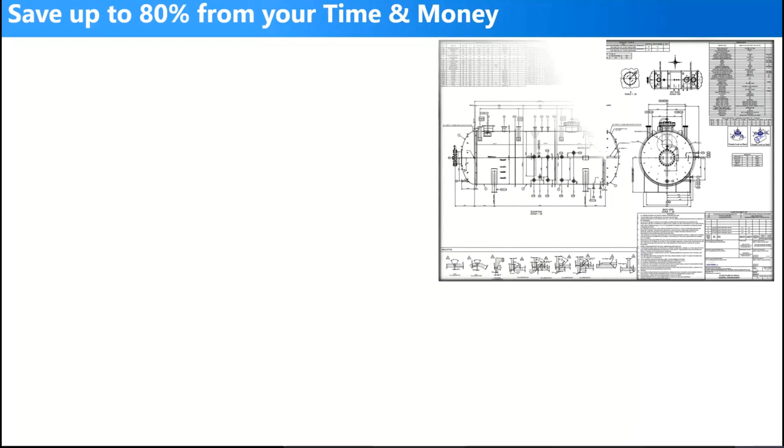You can create your bill of material automatically by using SEG software. Actually, you will need Autodesk Inventor as a platform to be able to run SEG. By using SEG software, you can save up to 80% of your time and money. We made an actual case for an equipment. This equipment we created by 3 methods.

You can see that we created all of those drawings by 3 different methods. The first one is the traditional method using 2D CAD software, and we created those drawings in 50 hours to generate the general arrangement drawing with all tables, notes, design data, welding details. The same for bill of material, manway detail, nozzle detail, nameplate, saddle, and the other details for this equipment.

By using a CAD software like SolidWorks, Autodesk Inventor, CATIA, just pure CAD software, we consumed around 27 or 28 hours to generate the 3D model.

Sorry to interrupt you, Mr. Ahmed. Hello. Yes. Sorry to interrupt you. Your voice is not coming very clear and it's coming with a low voice. Can you speak more loudly and more clearly? Okay. Hello. Yeah. Okay. Now it is okay. Now it's okay.

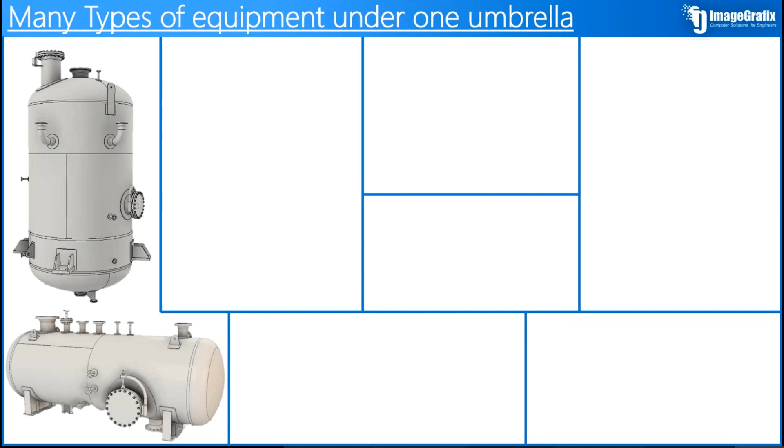By using SEG software, you will be able to generate many different types of equipment under one umbrella. You can generate horizontal, sloped, and vertical vessels. You can generate columns with multiple sections and different diameters, storage tanks with a fixed roof, heat exchangers according to TEMA, piping, ducts, and slug catchers.

Here are some real samples generated by SEG software. As you can see, we generated a storage tank with a fixed roof, and you can see the top and bottom plate arrangement, spiral stair, manway and clean-out door. And here are some samples of vessels created by SEG software, and you can see that from small to large size vessels you can create them easily.

You can make piping on the equipment easily, and elements like the end closure. You can generate the TEMA exchanger types by using SEG software with many different types, and we will discuss it, inshallah, in another slide.

In SEG software, we depend on the construction tree. In the SEG tree, you will build your equipment, and in this tree, you will define the equipment and each element inside this equipment. We have different levels in the tree. The first level is the project level.

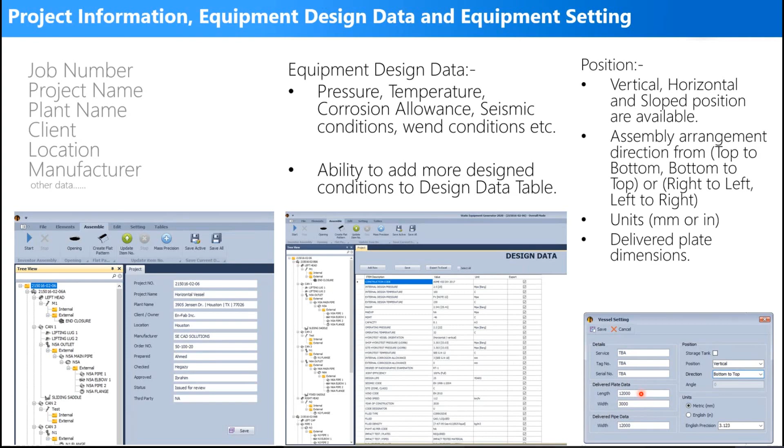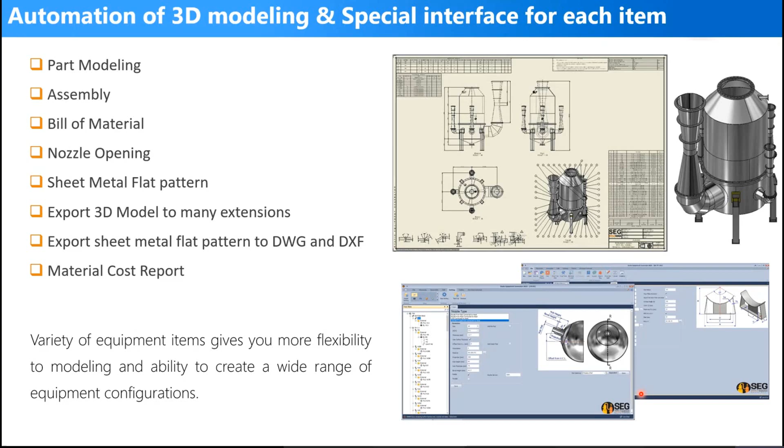Mr. Ahmad, skip this one. Okay. Yes, skip this one. This is not our product. Just a minute. Can you go back to the previous slide, Ahmad? One more previous. Can you just clarify the plate nesting cutting part? Can you give them some idea? Yes, this plate nesting is required. Can you explain this? Okay.

There is a nesting tool Autodesk provides, so we can use it in SEG to generate the nesting for all plates in your project. SEG software creates each plate as a separate plate, and you can get the flat pattern of this plate, and easily you can make a nesting for your equipment. As you can see here, we make a nesting for plates, and automatically by using this nesting tool you can generate the required number of plates and the efficiency of cutting, how much you can save from your plates during this operation.

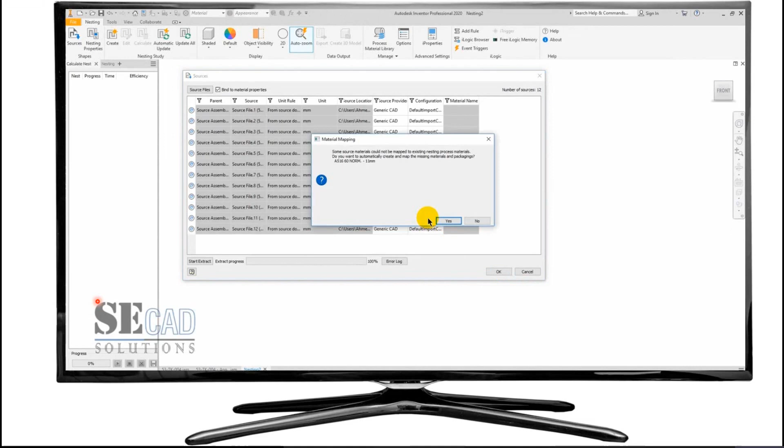And here is a video to show you how to make a nesting for the annular plates. For example, we will open the assembly created by SEG, and here we will make a nesting study for the plates. Let's click yes. And here the nesting tool from Autodesk will detect automatically the thicknesses and the material of plates, and depending on that it will generate a study based on the thickness and material of each plate.

After making the nesting, if we stop this, you can see that after this process you can calculate the required number of plates and make a nesting for this. That's a bottom plate, and we can make the same nesting process on it. So let's modify this.

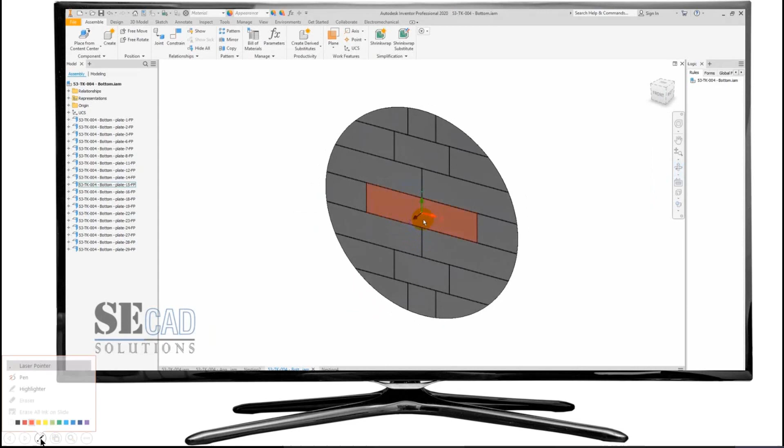Okay, so let's move forward here, and you can see that after the nesting, those are the elements of the bottom plate, and here the nesting of those plates, and you can see that in some cases you will get two plates in one sheet, and the same here.

And if we come back to the annular plates, you can see that the nesting efficiency here is around 80%, so you can save this value from the plate dimension, and for the number of total plates required, you will need 3 sheets, and in those 3 sheets you will get 12 parts of annular plates.

So by using this nesting tool, you will be able to make a report. Here you can generate a report for the nesting. Okay, and here you can export this report in PDF format, and you can calculate the cost and many different things by using this tool. Okay.

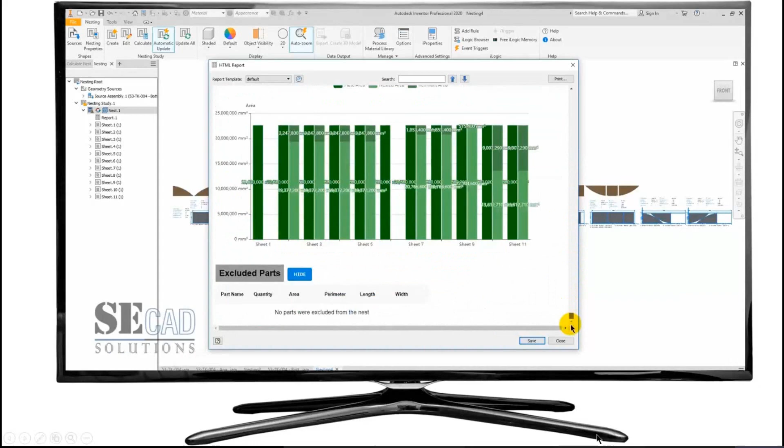Another tool is for importing the exported CSV file from HTRI. So if you are using HTRI software in the thermal calculation, you have the ability to export the CSV file from HTRI, which includes the tube arrangement on the tube sheet. And we have an integration tool. This tool can read the exported CSV file and generate the tube pattern arrangement. By using this tool, you will be able to make the holing for tubes, tie rods and sealing rods.

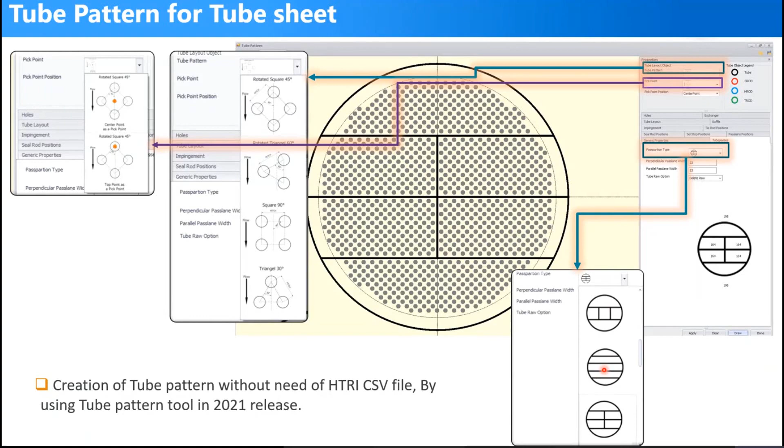Okay, we have another tool in SEG software. You can use it to generate the tube pattern arrangement if you don't have HTRI software. By using this tool, you will be able to change the tube layout or the tube pattern, the pitch of the tubes, and the pass partition, and we will discuss this in depth in other slides for the heat exchanger. Okay, let's skip this slide. It's for the tube pattern, because we will discuss it.

Sorry, Mr. Ahmed, just to interrupt you. I want to know whether all this data will come directly from PV Elite, or how is the interaction? Because what I understand, you are interacting with three softwares, no? SECAD, Inventor, and PV Elite. But where is the PVLite data coming from? I'm not able to understand how this data is coming from PV Elite. Okay.

So SEG software includes an integration tool. This integration tool has the ability to read the exported MDB file, which is an Access database file. You can export this Access database file from PV Elite. But this Access file has some limitations. For example, if you would like to export information for a heat exchanger, no information will be exported for the tube sheet or the flanges of the tube sheet. So this tool in PV Elite software has some limitations.

But in Visual Vessel, you can export a lot of information to the Access database file. In SEG software, you can read this exported database file and convert it automatically to SEG items: shell, head, nozzle, supports like saddle, and we will check a video like that during this session, inshallah. So this way, you have a model in PV Elite. You will export an Access database file from PV Elite. After that, by using SEG software, you will read this exported MDB file and convert it to a 3D model in Autodesk Inventor. And in the same way, you will create the 2D drawings of this equipment.

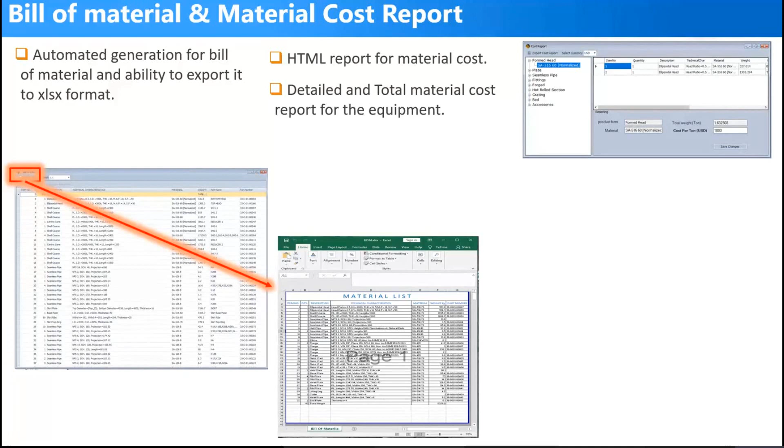Here in exporting options, you have the ability to export the 3D model. Okay. You have shown one development of the plate. So can we do the opening before the rolling? Is it that accurate? What do you mean by nozzle opening? Can we cut out the openings before the rolling? Yes, yes. Is it that accurate?

By using the holing process, you have the ability to define the clearance of the cut around the nozzle. After that, by using this tool, you will get a cut around the nozzle with the clearances that you defined, as you can see here, there, and for each nozzle. After that, by using the sheet metal flat pattern tool, you will get a flat pattern for this shell plate with all nozzle cuts. Is this point clear, or do you still have any issues?

I want to just clarify how it is accurate. If I am doing the opening of the 24-inch nozzle at the time of the plate cutting, and after doing the opening in the plate cutting itself, I do the rolling, after the rolling, should I get the exact dimension as I required for the nozzle opening? Hello. Actually, I wanted to understand your question correctly to answer you correctly. I will repeat one more time.

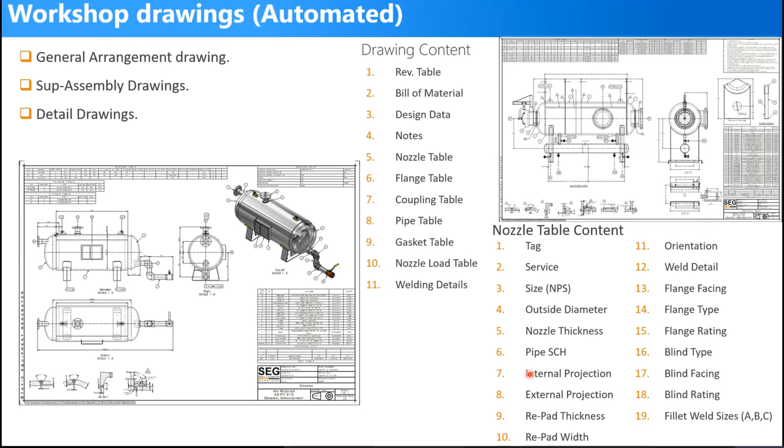In SEG software, you have the ability to select your standard border from the choice of the company border, or if you would like to create your standard border, we generated a new tool for that, and we will discuss it inshallah in another slide. By using this tool, which is importing reference drawing, you can import your reference template, which includes your title block and your border, and you can use it in your drawings automatically. In each drawing you generate, you will use this reference drawing. In SEG, you can find a huge library of standard welding details, and you can select from them to export to your drawing.

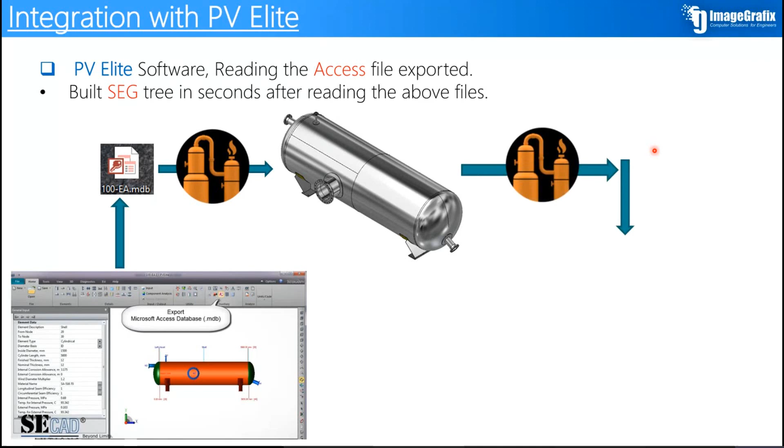Here, that's the PV Elite integration tool. In PV Elite software, you will export the MDB file, which includes some data of your equipment. And by using SEG software, we have the ability to read this MDB file and convert it to a 3D model on Autodesk Inventor. After that, you will be able to generate your drawings for this equipment. Here in this quick video, we will discuss how we can do that.

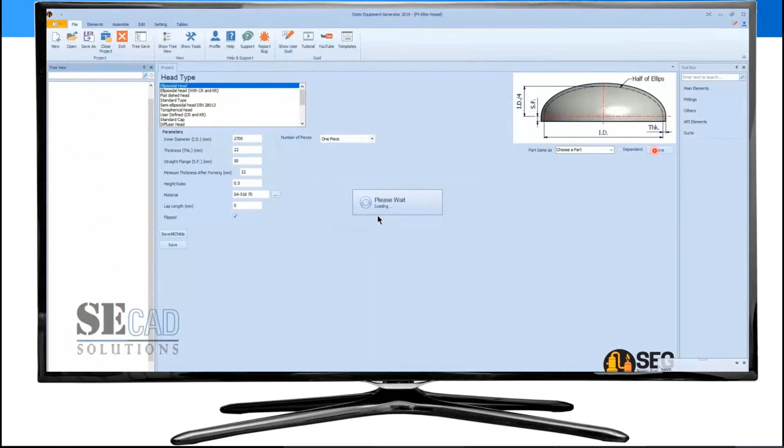Here we generate a new project, and from the import tool we will import the MDB file, with some information like the welding detail, longitudinal welding line orientation for each course, the saddle support. After importing the information, you can see that the tree is created automatically in SEG. Now we will save all information by using the tree save button to save all information that we imported from the MDB file. And now we will generate the 3D model on Autodesk Inventor. Okay, now we have the complete 3D model.

After that, you can make some customizations on this model, like modifying the support saddles to suit your fabrication requirements, add some attachments like the nameplate, because in PV Elite there is no information for the nameplate, so you can import a nameplate or some supports or some internals, modify the davit for the manway and the bolts. Many other things you can add to your equipment after importing it from PV Elite to make it suit your application requirements. Okay, now we will go to another slide.

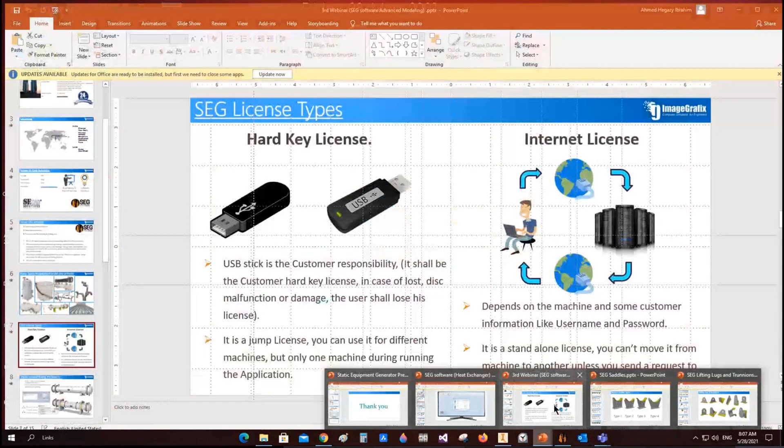For the... here that's for 3D modeling. We need to, so let's close this. That's for heat exchangers.

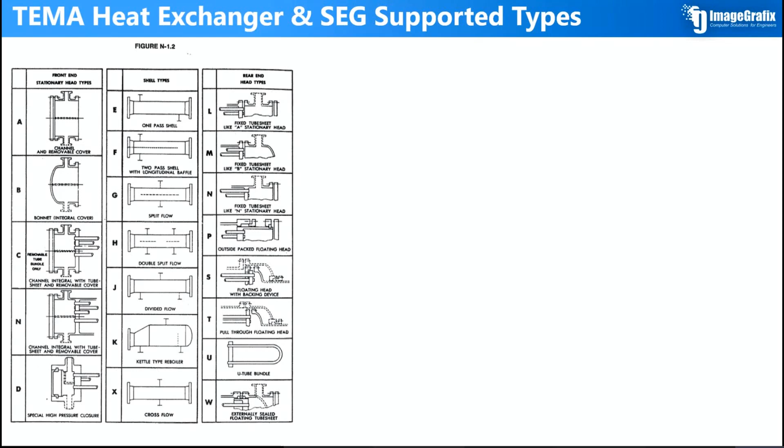Here for TEMA heat exchangers, as all of us know, the TEMA exchanger type includes these three sides: front end, shell type, and rear end. By using SEG, you will be able to generate A, B, C, N types for the front end, and you have the ability to generate all types for the shell type. And on the rear end, you have the ability to generate L, M, N, S, U types.

For the front end, as you can see, on the A type, for example, you have two different cases, and if you would like to make a modification or generate an odd shape, you can do it by creating the items separately on the SEG tree, and we will discuss that inshallah. And for example, for the C type, the channel integral with tube sheet and the cover, so you can generate those types for the front end.

And for the shell type, you can generate all types on the shell side. And for the rear end, you have the ability to generate those types. For example, in the L side, if you would like to make a channel like this or with a cone like this, and the other types of S, M, N, and U.

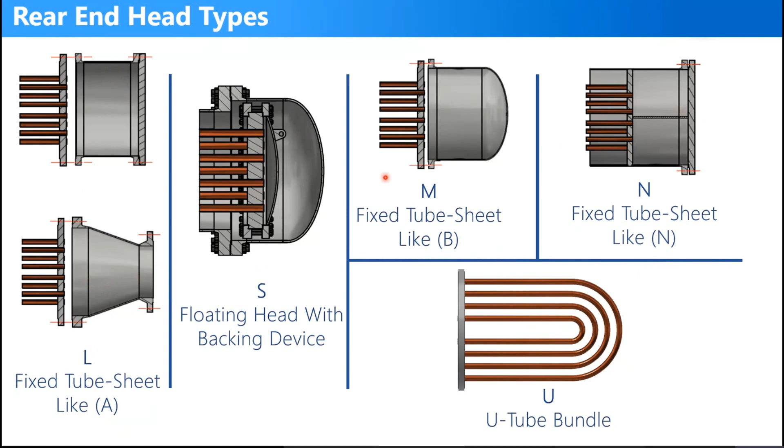Some of the most common types of heat exchanger, like AES, BES for the kettle type, or the AEM or BEM, you have the ability to make that. In this video, I will show you how to add items of the exchanger manually, if you would like to generate the exchanger element by element instead of using the exchanger tool.

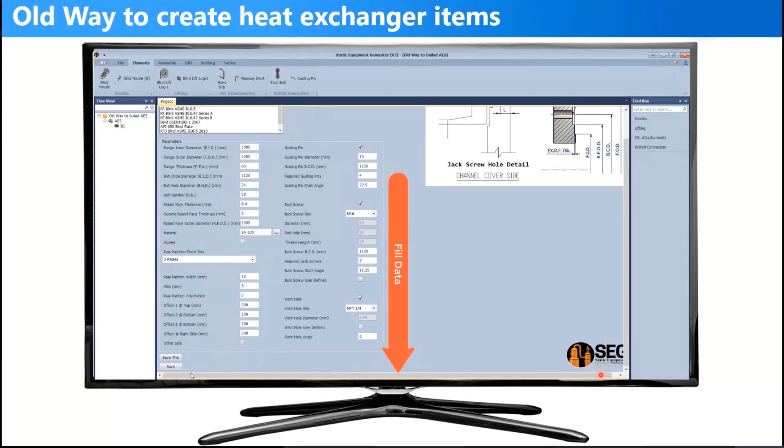So as you can figure, we add a blind nozzle. After that, we add a gasket and flange. To generate a channel, we will add the items separately. So the channel includes blind, gasket, another flange, shell, flange. Okay, so we will generate those items

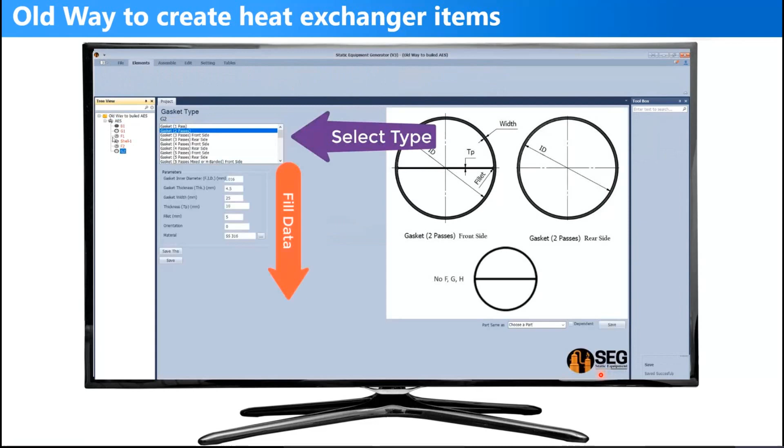separately and define the dimensions of each item on the tree by filling the data from the interface or the input data of the element. Okay, so you will select the element. After that, select the suitable type and fill the required data on each element.

Okay, the benefits of using the exchanger tool, which is the parametric modeling or automated parametric modeling. By using the parametric modeling tool, you have the ability to equal some parameters with each other. For example, if you have an ellipsoidal head or a hemispherical head and a shell after this head, if you define the diameter of the head separately, it will not be reflected to the shell. So you will need to come back. Like in PV Elite, if you change the diameter of the shell, it will change it separately.

But here, if you would like to make a relationship between some parameters, like make the inside diameter of the head equal the inside diameter of the shell. And if you would like to make more than that, more items, not 2 only, if you would like to make it for 10 items or more, it's applicable. So by using this tool, you have the ability to equal some parameters with each other.

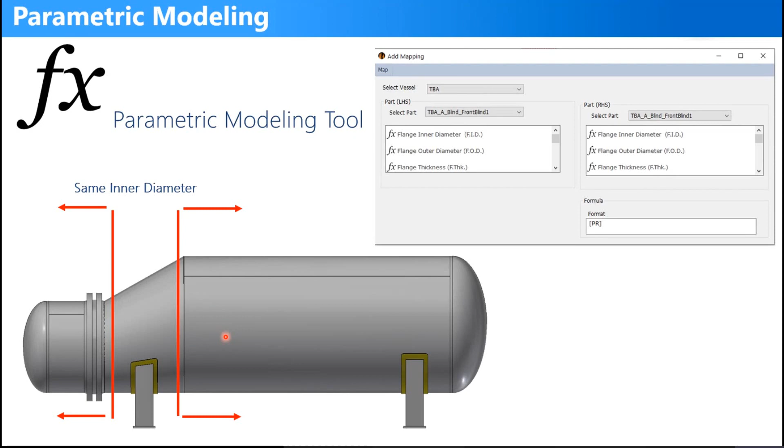Like if we take a look at this video, for example, here we have an ellipsoidal head. So the inside diameter of this head, as you can figure, is different from the shell inside diameter. By using the parametric relations, we will generate a new relation between 2 parameters. At the beginning, here we need to define the first part, which is the left head. This name is indicated here on the tree. It's the left head, and the second element is shell.

So by using this tool, we will select the first element and select the required parameter, which is the inner diameter of this ellipsoidal head. After selecting and double clicking on it to appear here, this parameter is selected now, and we will go to the second side and select the shell. After selecting the shell, we will select the inside diameter of the shell. So now we will make a relation between them and make them equal each other.

Okay, you will click on mapping and close this form. After that, we will define the inside diameter of this ellipsoidal head. So we will change it to 1500 and come back to the shell. You can figure that the diameter is changed automatically. The same we can do with other parameters like thickness.

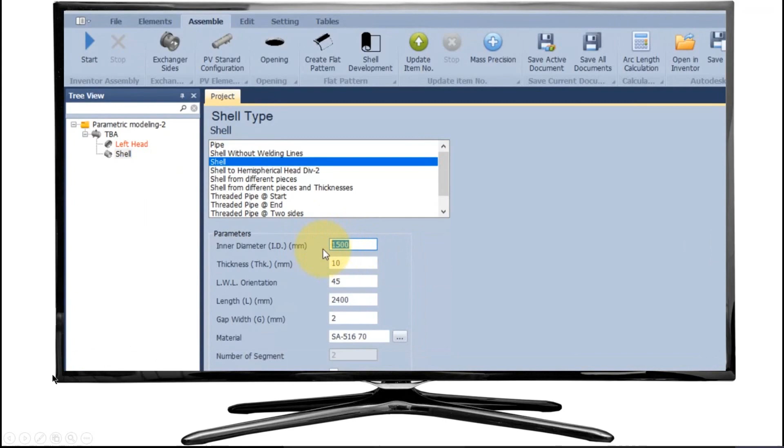For example, if we open that one and select the thickness in this case, and from the right side we will select the thickness. So we will make a relationship between the thicknesses for each item. So you have a new equation for the thicknesses. So automatically, in case of changing the thickness of one of them, it will be reflected to the other. So let's come back to the left head to figure out that we change the thickness of the head.

In heat exchanger, we will automatically generate the relations between elements. For example, if you have connected flanges for the channel, the blind flange and the connected flange and the gasket, some of those relations will be generated automatically, like the outside diameter of the flange; they should be the same. If you change it on one side, it will be changed on the second side.

The bolt circle diameter, the inside diameter and the clearance, number of bolts, raised face diameter, and diameter of bolt holes. So those are a sample of relationships for some items. So in case of changing the number of bolts on one side, it will be changed automatically on the second side.

The inside diameter of the flange, the outside diameter of the flange, the number of holes, all of that will be reflected. Okay.

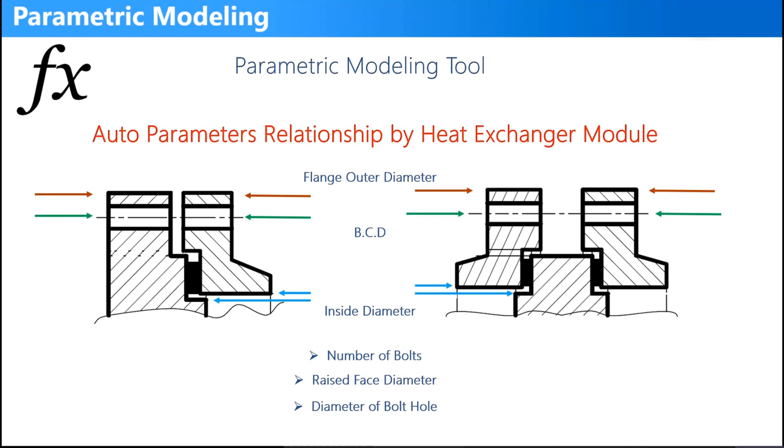Actually, this type of saddle was a requirement from one of our clients. They are a heat exchanger manufacturer in Canada, and they are a great manufacturer. They usually use this type for their heat exchangers, and they asked us to add this type to be able to use it in their models. Okay, now we will discuss the different options in each type.

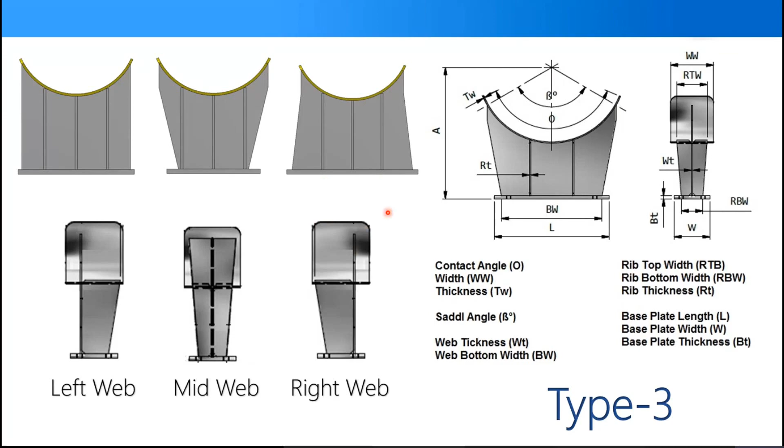More options you can do on the saddle, like the saddle cut. If this area is tight and you need to tighten your anchor bolt or the nuts of the anchor bolt, some manufacturer specs include this cut on the saddle. So by using this option, you can make a cut on the saddle to suit the fabrication requirements. You can also make slot holes instead of straight holes.

And if you have a saddle with a sliding plate, like you have Teflon below it and another fixation, you will not need holes, so you can make this saddle without any holes. You can control the pattern of the holes, on the short side or on the long side, so you can make a hole here or there.

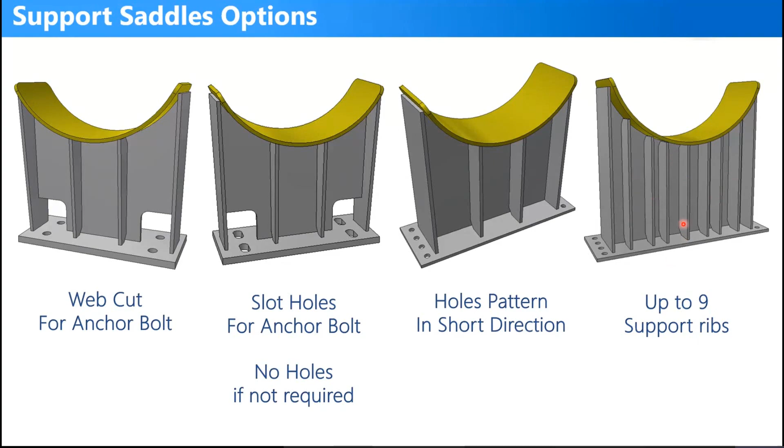You have the ability to add up to 9 ribs on the saddle. I think this number is fair enough. Okay, the same we discussed on this slide for the drawing. So let's close this and come back to some options for the type of licenses and the drawing options.

The license of SEG software is available in two different types. The first type is the hard key license, a USB stick that includes a license file. By connecting this USB stick to your machine, you will be able to run SEG software, and if you remove it, you will not be able to run it. The benefit of this type is that you can run SEG on different machines, because this license is a jump license. You can move it from one machine to another; it depends on the USB stick itself.

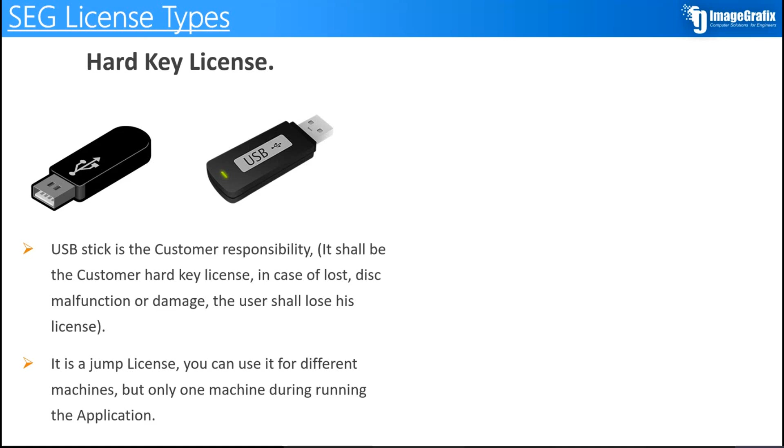If you move it on another machine, you can run the SEG software on this machine. Okay. The second type is the internet license type. In this license type, you should be connected to the internet all the time, and your license will be defined by your information, like your email, the login information and the machine information.

So in this type of license, you will not be able to change the machine unless you make a request to change your machine. Okay, on the same day we can do it. If you would like to remove your old machine and replace it with another machine, you will make a new request, and we will give you the ability to use your new machine. But this type of license depends on the internet, so you should be connected to the internet all the time while you are running SEG software, and you will not be able to change your machine unless you send a request.

Okay, that was our last webinar. In the last webinar we discussed some points regarding the project assemblies, like if we have a stacked heat exchanger and we would like to make an assembly for this heat exchanger by using the project assembly tool and defining the spacing between equipments, we can generate the assembly of both heat exchangers to create the final drawing for both of them, and generate the general arrangement drawing with multi-sheets.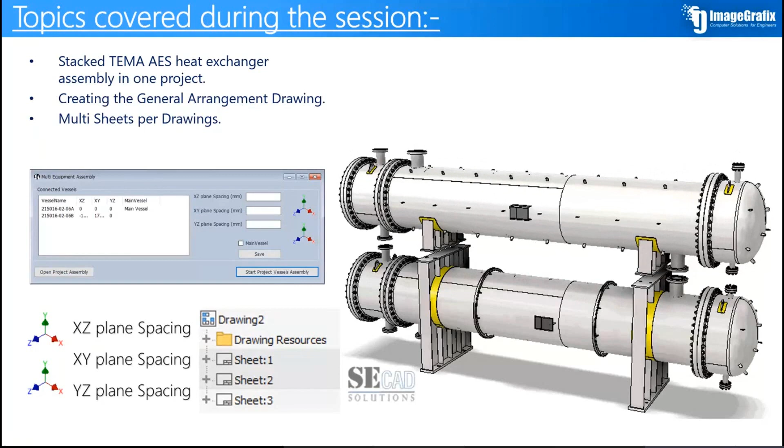In some cases in large equipments, you have a large bill of material, so if you add all the information in one sheet in your drawing, like the views of the equipment, the nozzle table, bill of material, design data, all of that in one sheet, it would be a lot of information in one drawing. And if you would like to separate some information in different sheets, you have the ability to do that by using a tool for making separate sheets in your drawing.

And then in this session, we discussed how to create the assembly for the jacketed vessel by making an inside vessel, which includes this coil, and we made this sample in this session.

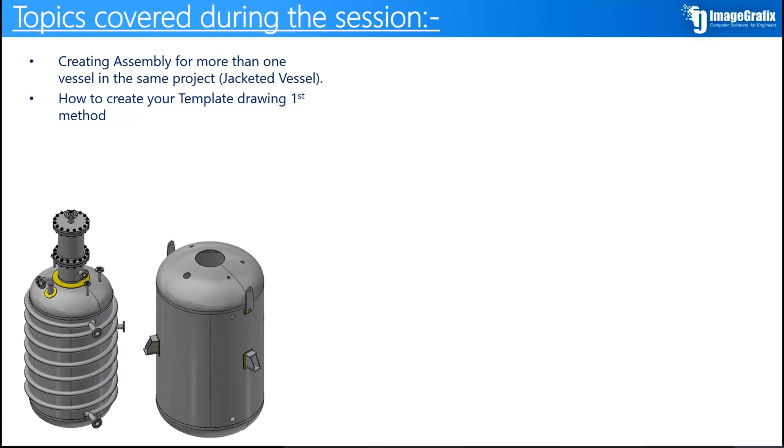Here in this session, we did the inside vessel and the outside vessel, and by using the project tool, we generated the combination of those two vessels and generated the jacketed vessel, which includes the inside and the outside vessel. And by using SEG tool, we generated a separate template drawing, and discussed how to generate your standard template drawing, and use it as a reference drawing for your projects.

Okay, here is how to create your border and how to generate your title block. And by using this tool, which is the import reference template tool, you will be able to import your reference drawing, define some dimensions for your standard drawing, and use it in your projects. And if you would like to change it from one project to another, you have the ability to do that, because you have some different information like the owner, the owner logo or the name of the project, so you can change your title block and border and make it a reference drawing for your project.

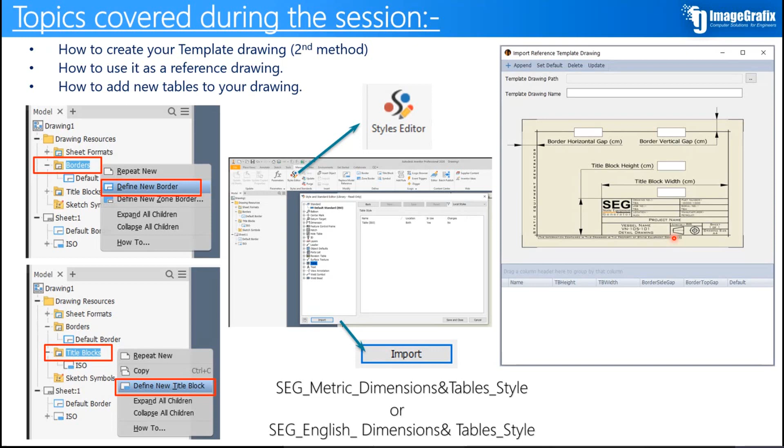Okay, and we discussed in that session how to change the units. You have the ability to change the units of your model and the units of your drawing. So you can make the units in fraction and control the fraction value. That's in case of inches. And in case of millimeter, you will make it decimal.

You have the ability to group. If you have different equipments in your project, you can make a group for the overall bill of material, or separate each equipment in a separate bill of material. You have the ability to make the size of nozzles in NPS or DN and change the sort numbering configuration to generate the general arrangement drawing of the equipment. Okay.

Here is the exporting tool. We discussed this on another slide: how to export the 3D model and how to save your models or your drawings in different extensions. Okay, so let's close this slide.

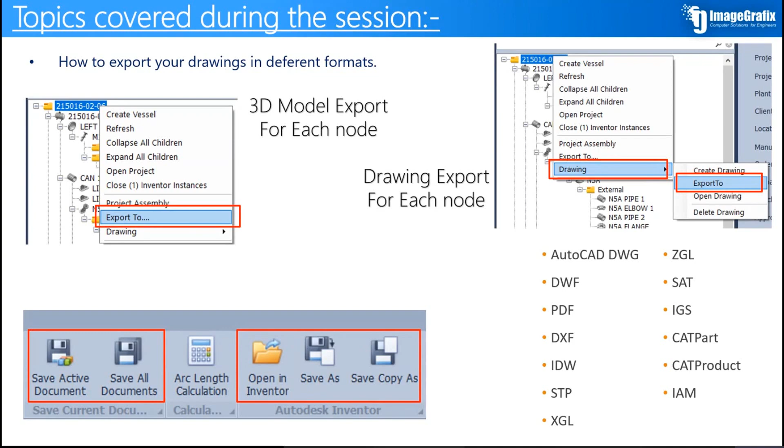The last one is for the lifting lug. Here, for example, we have different lifting lug types in SEG, so you have the ability to select between them to suit your case. For example, this type of lifting lug or that one. For this one, you have the ability to make this a circumferential lifting lug in the circumferential direction and to control the dimensions of this lifting lug to change the shape.

And you have the ability to add a wear plate or collar for this lifting lug. If you would like to remove them, it's optional, so you can do that. This type of lifting lug is usually used on large diameter vessels, and that one for large weights. So you have many different shapes of lifting lugs, and in each shape you have different options.

For example, for this type of lifting lug, you can make this edge a straight edge like this, or make it with this cut, and make this cut with fillets like this. Regarding the end at the top here, you can make it with a fillet or a chamfer, so it's an option. Many different options in each type give you flexibility to create many different configurations. For this type, you can make the end with a chamfer or a fillet, for the circumferential and longitudinal direction.

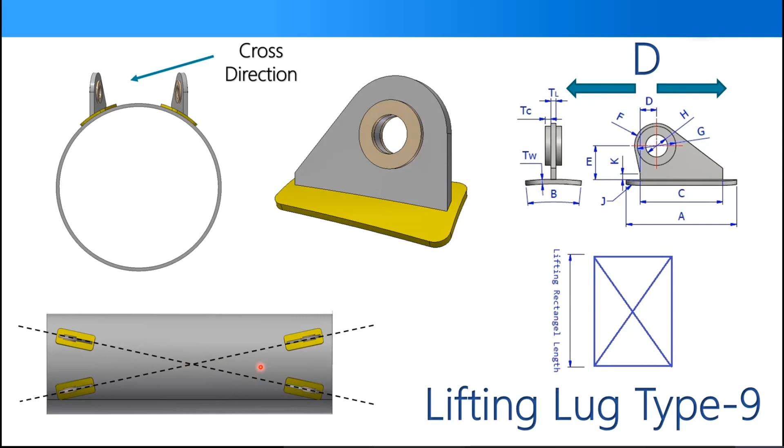Okay, now let's start creating a sample. We have the SEG software, and from here let's generate a new project. By clicking the New tab, we have this form for a new project, with many different modules. The first is the overall module, where you can generate all equipment and all features will appear, like the heat exchanger features such as the tube sheet, the tank roof and bottom plates, and the duct shapes. But if you select one of the modules below, only the features of that module will appear.

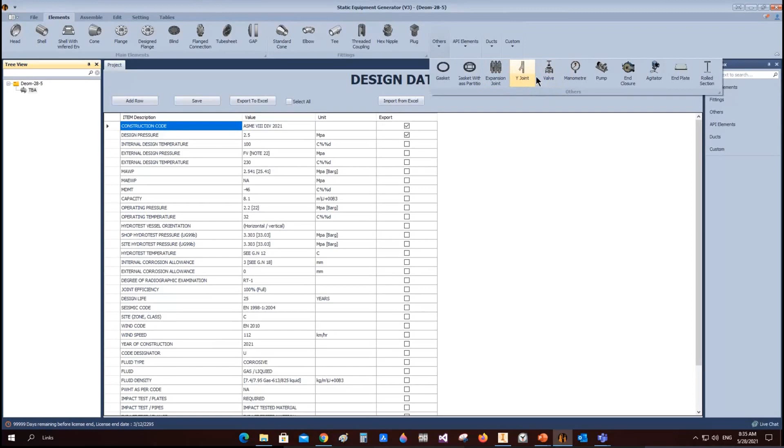And for... yes. Yeah. Can I share one of our PV Elite files and you just show how you can fetch it in this software? Chapan, let him continue first. Let him complete it. I think what he's showing is interesting. Once he completes it, then we can share it.

Okay. Here on the API elements for the roof, you can see the annular plates, compression ring, roof, arrangement roof, dome roof, many different types. Ducts, as we discussed, in case of generating a new project, if you select overall, all of those features will appear.

Okay, but if you select a pressure vessel, for example, the ducts features will not appear and the API elements will not appear. Some features like tube sheet will not appear. Okay, so in case of overall, all of that will appear. And you can select these elements from the toolbox right here.

So you have the ability to move this toolbar to different locations. So here you can add elements or fittings or others. So you can add elements from here or from this toolbar. Okay. Now let's add an ellipsoidal head, for example.

Okay. And after adding this head, you can see that we have more than 17 types of heads, like ellipsoidal head as half of an ellipse, or ellipsoidal head with crown and knuckle radius, or flat dished head, a diffuser head, standard cap, and you can get the shape from the image on the right hand side.

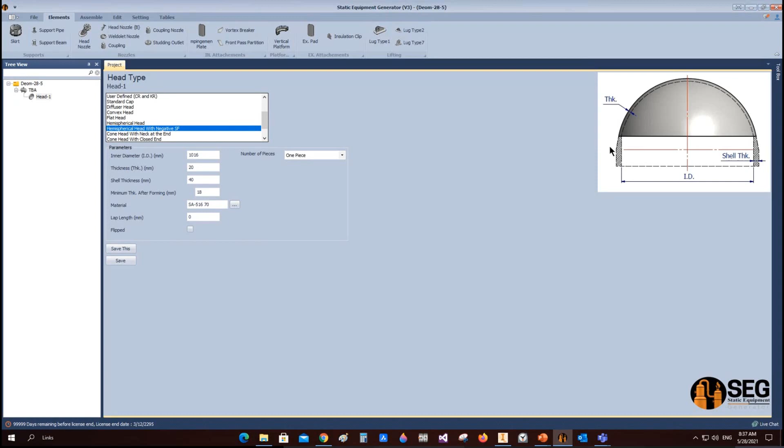From here, we will generate a head with 2 meters 0.5 and define the thickness, the straight flange length of this head, minimum thickness after forming, and the head ratio. And from here, you will change the material.

So you can write it manually here, or by using the ASME database material, you can select the material from the list. So first select the table according to ASME and search for your material like SA516. So you can see that the search gets 4 types with different grades. Okay, so just select the suitable grade, and here is the UNS number for this material.

And if you would like to make it an impact tested material or normalized, just select this checkbox. And if you would like to make any remarks for this material, like some extra tests will be done on it, you can add it on the remarks tab. Now let's click done to add the material here. So let's click this head, and let's click on assembly to start generating this head.

Okay, you can see that we have this ellipsoidal head now generated on Autodesk Inventor. Now, by the way, you have many different options on the head itself. For example, if you would like to make this head from one piece, you have an option to make it from one piece. And if you would like to make it from 2 pieces with a longitudinal welding line like this, kindly take a look at the image on the right hand side.

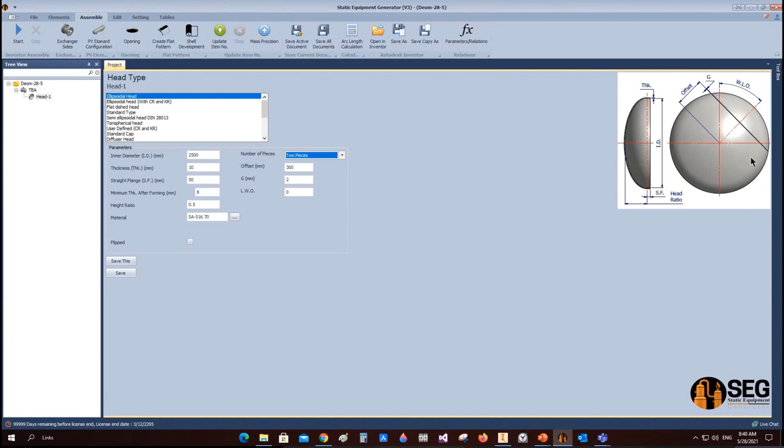So you have the ability to define the location of this longitudinal welding line and the orientation of this welding line. And if you would like to make it from segments like this, it's an option in the same head. So in the same head type, you have those options. So you can see that SEG gives you more flexibility to make the items with different configurations to create the suitable element to suit your case.

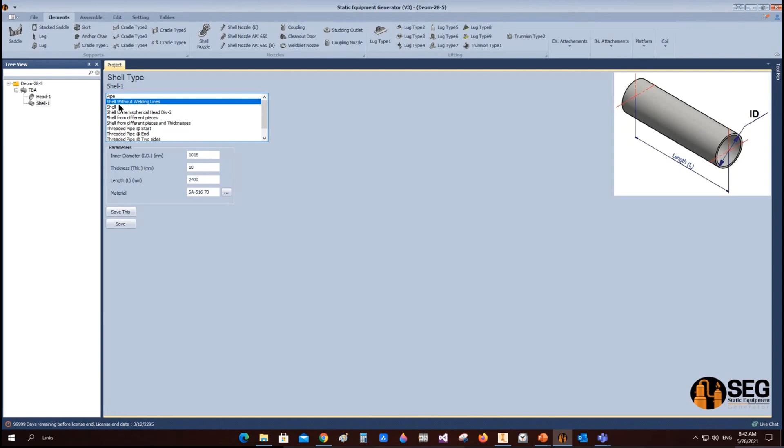Okay, the third type, which is the shell, includes welding lines in case the circumference of the shell is small and the delivered plate dimension covers it. For example, let's come back to the vessel, and from the settings as we discussed, that's the length of the delivered plate, and that's the width. That length will be rolled to create the circumference of the shell. If this value is greater than the total circumference of the shell, one sheet will cover it. But in case of large diameters or a small delivered plate length, SEG automatically detects the number of sheets required to make this circumference.

Okay, and here you have a tool for the arc length calculation. For example, if you have a vessel with 6 meters diameter and you would like to calculate the total circumference of this shell, you will need around 19 meters for the total circumference. So this value, which is 12 meters, will not cover the circumference of the shell. Okay, so let's come back here and complete.

So for the shell, you can generate this type of shell, which we discussed, the shell with chamfered edges for the hemispherical head for Division 2, or shell with different pieces. Those types, shell from different pieces and shell from different pieces and thicknesses, are usually used for storage tanks. For storage tanks, in some cases you may need to define each plate separately, so you will define the circumference length of each plate separately. And you also have the ability to define the thickness. So you can make a plate with 4 meters length, for example, with thickness 10 millimeters, and another one with a different length and a different thickness.

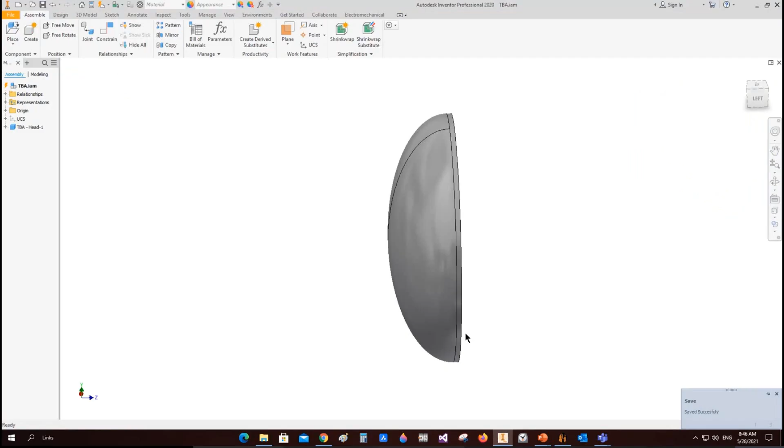Okay, now some more options on the shell itself. If you would like to make this shell with 3 or 2 or 4 equal plates, you have this option here by enabling segments. So by clicking on this button and defining the number of plates, if you take a look at the image here, you can define the required number of plates, but in this case they will be equal to each other.

Now let's add another shell course. So from shell we will add shell 2, and from this you have the ability to make the shell plate look like another old node on the tree. Here from this button you will select part same. And from this list you will see that you have only shell 1, because we have only one shell plate. So in this case we will make this shell look like that one. So all information here will be reflected there.

And if you would like to make it dependent, means in case of a change in shell 1, it will be reflected to shell 2. But in this case we need to make some changes on the length or longitudinal welding line orientation, so we will not select dependent and select add. And if we come back to shell 2, you can see that the same information of shell 1 is here. So we will change the longitudinal welding line orientation a little bit and change the length of this shell course a little bit and click save.

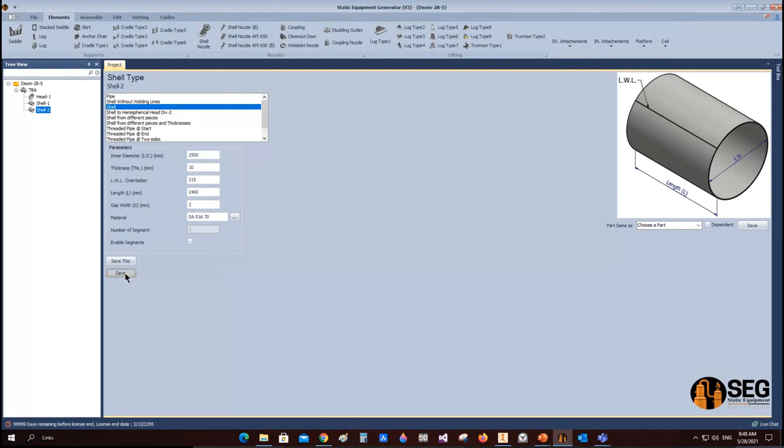Now let's add another head 2, and by the same way we will make it look like head 1. Okay, and let's click add. So if we come here, you can see that the same information of head 1 will be reflected here. One more option we will discuss after creating, which is the flip. This option will be available in some parts which need to change their direction, like the cone or head.

If you would like to make the large opening on the left side or on the right hand side. The same for the head, if you would like to make the convex of this head on the left side or on the right side. So let's create the assembly first, after that we will modify it. Here we create the second shell course, after that the last head. So let's take a section. Now we have this head on the tree, but it doesn't appear because of that. Let's take a section here.

You can see that the convex of this head looks like the first one. So if we want to change the convex direction of this head, we will use the flip option to flip the direction of the head. So we will click save here and flip the direction of the head.

Okay, now let's add some attachments to the vessel and check out how we can add them and modify them. Now we have this vessel without any sections. So let's come back here and select the head. From the head, you can see that there are many attachments you can add to this head, like support skirt, support pipe, support beam, nozzles, nozzles with internal projection, weldolet, coupling nozzle.

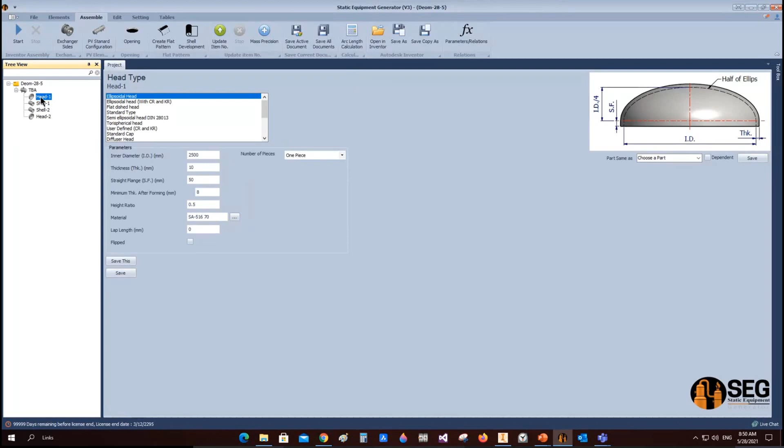The difference between coupling and coupling nozzle: this coupling is a coupling without any connections, but a coupling nozzle is a coupling you can add connections to, like adding a pipe and after that an elbow, etc. A studding outlet for the internal attachments like impingement baffle, vortex breaker, pass partition. For the head, you can add a platform, reinforcement pads, insulation clips, lifting lugs with different types.

So let's add a nozzle, N1. From add we have this nozzle, and you can see that we have different types of nozzles, like nozzle from pipe, nozzle from plate, long weld neck nozzle, or forged hub nozzle. So let's select a nozzle from pipe and select the size. Let's make it 6 inches, and from here change the schedule of the pipe.

Okay, select the offset from the center line. So we will define the offset from the vessel center line, this value, the offset of this nozzle. If you would like to make it at center, just make this value 0, but we will make it 750, and the orientation we will keep at 0 degrees, and keep the projection here at 30 millimeters.

The projection is the facing of this nozzle. Let's add a repad, change the repad width like this, change the thickness, and define the service of this nozzle as an inlet nozzle. And if you would like to define the nozzle load, you can define it from here. Okay, let's click save. Now this nozzle will be parallel to the center line and set in.

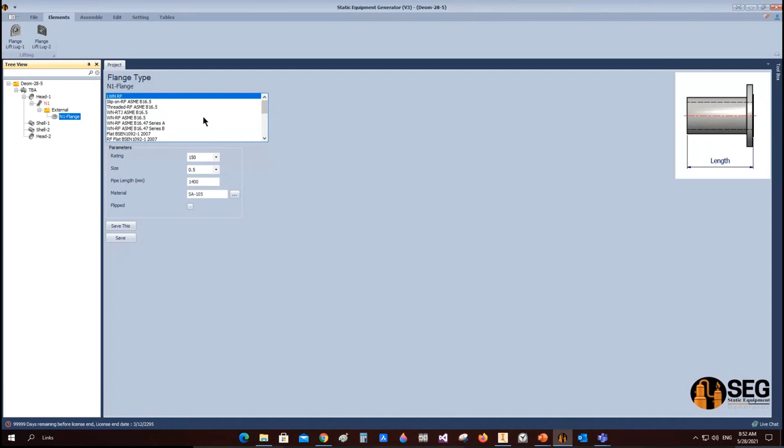Now if we come back to this nozzle and open the set welding detail, you can define the welding detail options of this nozzle. If you would like to set the fillet weld value, you can define it from here. Let's make it 7 millimeters, and click save.

Now if we open the calculator, you can calculate the projection with flange from the seam weld line, not the tan line, to the facing of the flange. For example, let's make it 1.5 meters and click calculate. Now SEG calculates the length. The projection of the pipe from here to there will be 861.

So we need to reduce it a little bit. Let's make this value 1 meter only, and click calculate. Okay, now this value is okay. We will accept this value, and you can see that the projection is reflected here. Now we will make this assembly of the nozzle.

If you would like to preview children during creation, there is an option in SEG that gives you the ability to preview elements during creation in Autodesk Inventor. If we come back to the settings of the equipment, under the preview options, you can preview the child during creation and the parent during creation. There are some other options we could discuss, and let's click save right now.

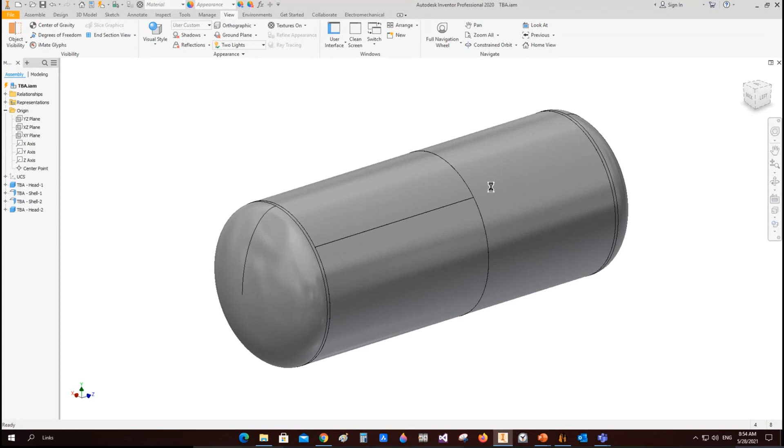Here we will need to make another nozzle with internal projection, and on this internal projection we add some attachments. So let's select this head or select the shell, for example, and from here you can figure that you have many different attachments on the shell, like saddles, stacked saddle, leg, lugs, skirt, anchor chair, different types of cradles, nozzle with external projection, nozzle with internal projection, nozzles according to the API with internal projection and external projection, coupling,

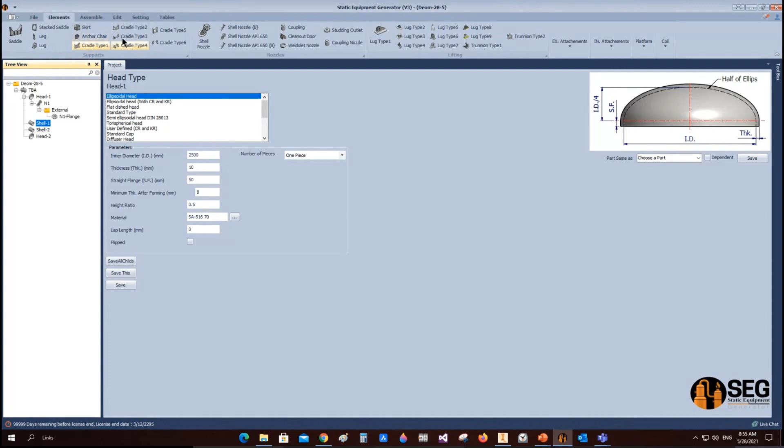clean outs, weld stud outlet coupling, different types of lifting lugs which we discussed on the slide, external attachments like nameplate, external bands, ground lug, fireproofing, stiffening rings, ribs for nozzles, ladders and insulation rings, many different attachments, and for the internals, impingement baffles, deflectors, longitudinal plates, stiffening rings, trays, baffles, vortex breaker, pass partitions, platforms, and coils.

Okay, now let's add a nozzle with internal projection. So from here we will select shell nozzle, and let's add a nozzle 2. For nozzle 2 with internal projection, you can figure that we have external and internal attachment. So in this type of nozzle, let's select the nozzle as a long weld neck connected with internal projection, or a nozzle from a pipe, or a nozzle as a connection nozzle. So you have many different options for the nozzle with internal projection.

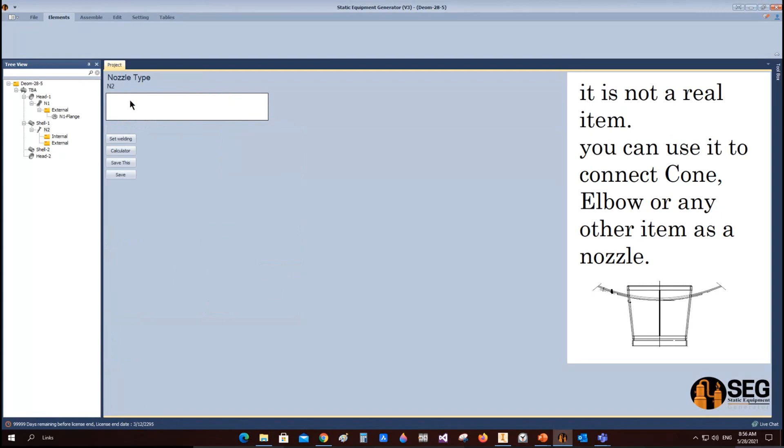So let's select a nozzle from pipe, and let's select it as 12 inches, the size, the rating, define the location and orientation. In this case, we will make this nozzle not a radial nozzle. Let's discuss some other options like hillside or tilted. So with the hillside, let's define the offset value from the center line, and let's add a repad for this one. Define the thickness and define the size of this nozzle, for example, and let's click save.

Here you have the ability to define the external projection or the internal projection, the direction of the offset. So let's make it simple for this nozzle first. In this case, you can figure that the child preview is running now after selecting the option of child preview. So you can watch each element during creation. Here we have this nozzle with an offset of 500 millimeters from the vessel center line.

And if you would like to reverse and make it clockwise or counterclockwise, you can change this by using the clockwise or counterclockwise options from here. So let's make it counterclockwise and click save, and let's run the assembly and come back to the 3D model to check the changes. Okay, now we have this nozzle on the other side like that, and now we will add some attachments to this nozzle. Let's take a section here, and let's add some internal attachments to this nozzle.

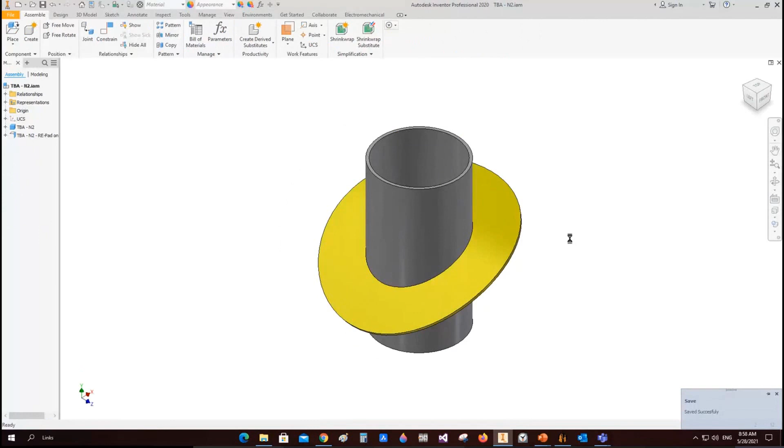Now we will come back here and select the internal connection of this nozzle, and let's add some attachments. For example, let's add an elbow into E1, and for this elbow, you can figure that you have many different types. Let's select elbow 90 degrees with a long radius, and select the size and the schedule, and let's click save. Now we will click on start assembly. Now we have this elbow like that. After that, you can add any attachment.

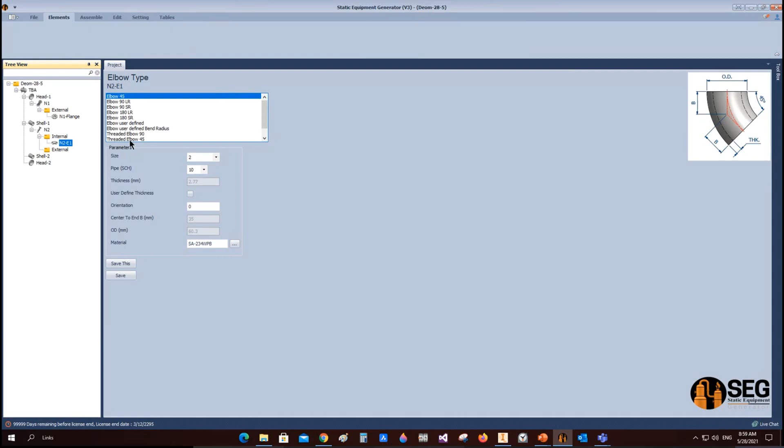If we would like to add a reducer, for example, from internal, let's select a reducer into cone. Okay, and from the reducer, you can figure that you have standard reducer or standard eccentric reducer. Let's select standard eccentric reducer, and the size is 12, thickness is 14, and the end size, let's make it 6 inches with 14 here, and let's click save. Now let's click on run. So now the eccentric cone will be generated and assembled to the model.

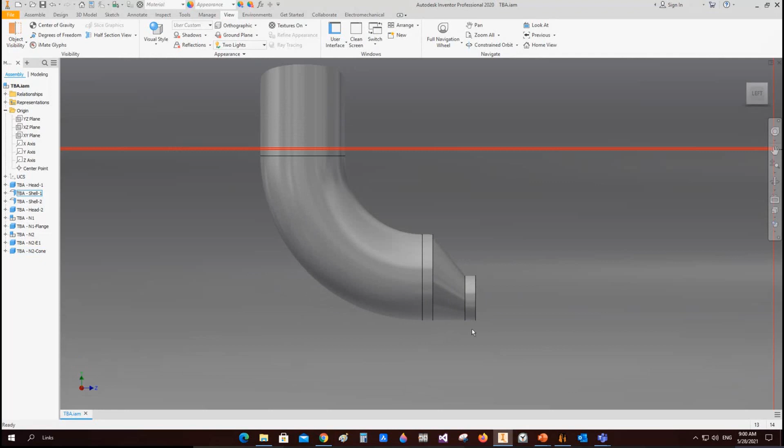Now you can control the orientation of the cone. The straight edge is at the bottom here, and that's logical. But if you would like to control the orientation of this cone, from here, that's the eccentric cone angle. So you can control the eccentric cone angle from here. So if we make it 0, for example, and click on Start the Assembly, the straight edge will be at the top like this. So it's not logical, but I would like to show you how to control some features of that.

Okay, now let's make another attachment like a support saddle, for example. So let's come back here and select the shell, and from elements let's add saddle. And by clicking on saddle, you can figure that you have many types that we discussed in the presentation. Right here, we will define the height. Let's make it 2 meters. The saddle contact angle, let's make it 140.

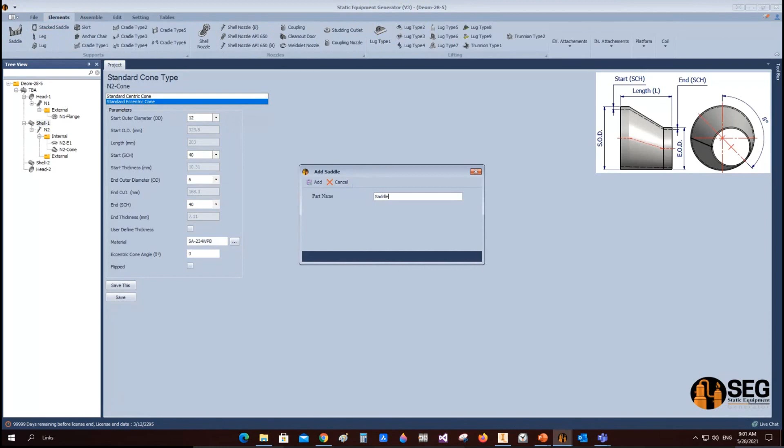The thickness of the saddle. We will make the saddle with straight sides, as we discussed. So the sides will be straight to the bottom. Okay, we will add a wear plate, and let's define the wear plate angle and the wear plate width, the thickness, and the fillet if you would like to add a fillet to the wear plate, the material, the base plate length.

So let's make the base plate length like this, and the base plate width, the thickness of the base plate, the hole diameter, let's make it 40 millimeters, the hole offset from the short edge.

Mr. Emir, sorry to interrupt you, just one query. Is it not possible to get all this data directly from PV Elite, or is it still not readable or in the development phase? Yes, as we discussed on the presentation. This is possible, no? You can read it from it, yes. Yes, it's possible. But I'm showing you the capabilities if you would like to make something from scratch on SEG, if you would like to make something like that.

And here I would like to show you how many items, because if I import the MDB file directly, you will not figure out what I want to say here from the elements. Okay, so I would like to discuss with you the different options and the different elements that you can add if you would like to make something manually instead of using the MDB file. Okay.

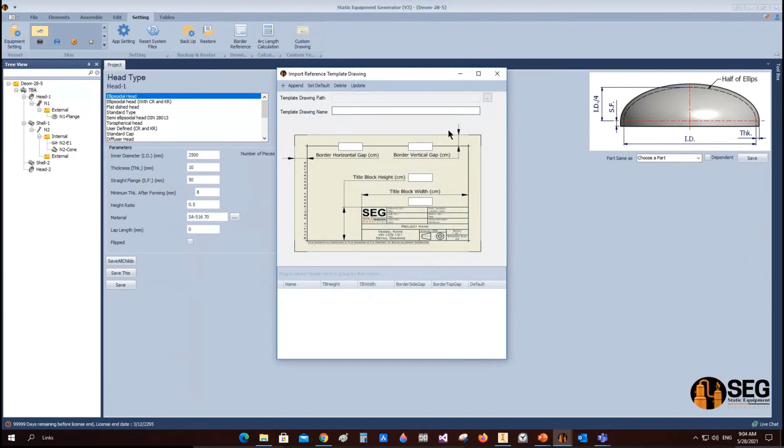Okay, now let's create a drawing for this equipment. From drawing, we will select create drawing. From here, you have the ability to select the size of the drawing. So let's select A1, for example. And from the second tab, you will define the orientation of the views that you would like to show on the drawing. We will make two views, the elevation view and the right side view. And from here, you will define the spacing between them.

Okay, and from here we will select the reference elevation view. If we take a look at the left view, in this form we will define the elevation view orientation. So if we select left view, the left view will be the elevation view. So we need to make this view an elevation view. And if you would like to make this view, for example the back view, the elevation view, you will select back from here.

Okay, so we will select the left view, and from the style, you can select between visible or hidden lines, and whether to make it shaded with colors or not. Here you will define the location of the view and the scale of the views, and from the tables tab, you will select the required tables in your drawing, like bill of material and design data.

If you would like to add a flange table, nozzle table, fitting table, for example, you can export those, and for notes, if you would like to add notes to your equipment from an Excel sheet, you can do that. For the welding details, you have a library of welding details here, so you can select from it.

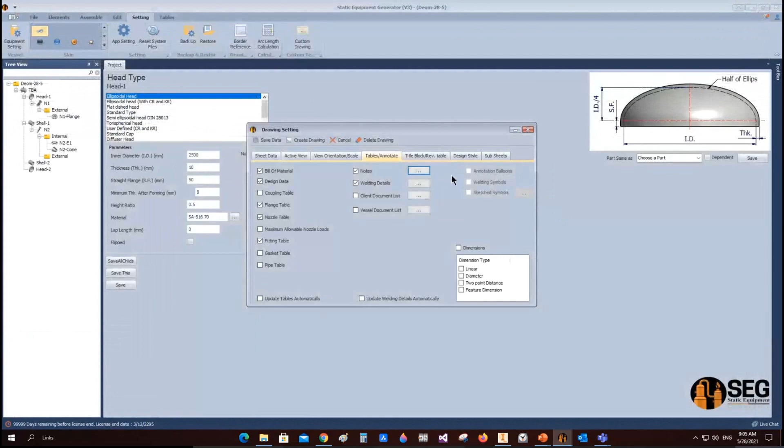From here, let's select this detail, a nozzle with a reinforced pad, and a nozzle with a reinforced pad with internal projection. Let's select a detail for the wear plate of the saddle and any other vertical attachment like that, and let's click save.

Let's add some tables like client document list and vendor document list, like mechanical calculation, name plate drawing, general arrangement drawing, saddle drawing. If you would like to make a list of your drawings, you can make it from here. Okay, and from the title block, that's the revision table. Let's modify it. That's the first revision.

Review, checked by and approved by. If you would like to add some empty rows, you can add it from here. The name of the drawing, the general arrangement, and the document number.

And for the design style, in this tab, you have the ability to select between styles. If you would like to separate some information in a different sheet, like if you have a huge equipment and you would like to separate the bill of material in a separate sheet because it's a huge bill of material, you can do that by using this tab.

Now let's generate the detailed drawing of the equipment. Here that's the elevation view, and now we have the side view of the equipment, the revision table, and here's the bill of material, the design data, now the notes. After that is a nozzle table. Okay, pipe and flange table, client document list. Now the welding details will appear here.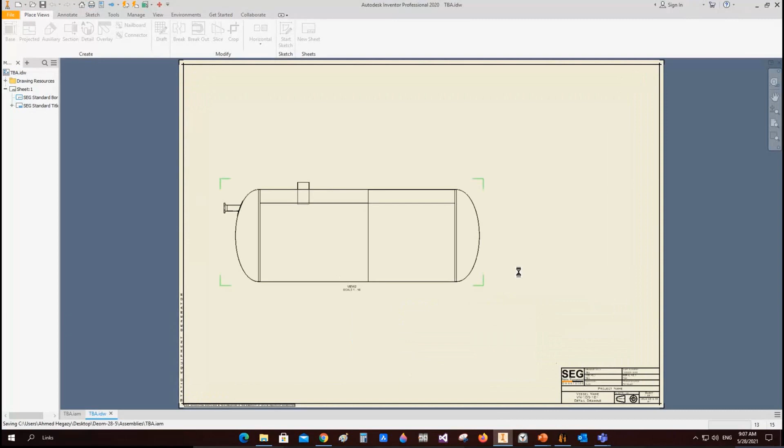And if you would like to make a detail, as you asked for the welding samples, for example, if you would like to make a welding sample on a drawing, you are dealing with Autodesk Inventor, and it's a very powerful CAD software. So you can do everything you would like to do.

Here from the annotation, if we would like to make, for example, a detail for this piece or for this area, you can make a detail for that one. So let's make a detail for this one like this, and let's move it like that. And if you would like to make a section on it, for example, let's make a section, and from a spline, let's select the spline tab.

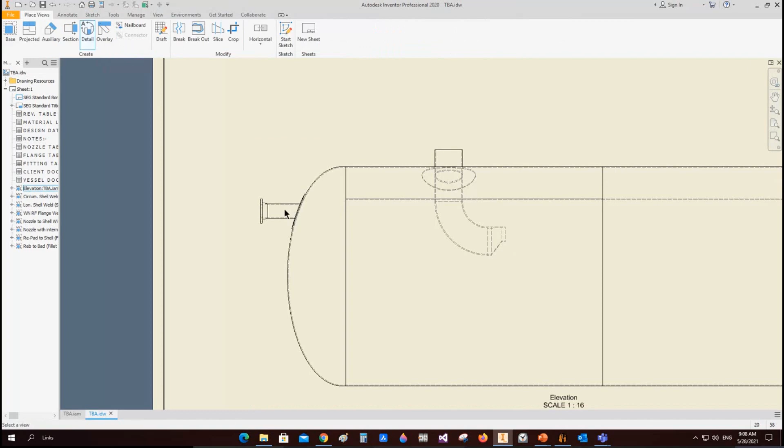Okay, and by using the breakout view, we will select this one and select the midpoint here and click OK. Now we have a section on this one, and if you like to add a weld sample here, from weld samples we will select this one, and from here we just select this and right click and continue. You can figure that you have many options.

At first, for example, you can make it like this, and let's remove this one. Okay, so you can make it like this, and you can make full like this. Okay, so you have many different options. If you would like to make it on field, for example, or make it continuous weld,

like that. And if you would like, for example, to make a fillet weld on this one, like that, you have the ability to make this as a fillet weld with, for example, 7 millimeters as typical, and make it continuous. So you have the ability to do that.

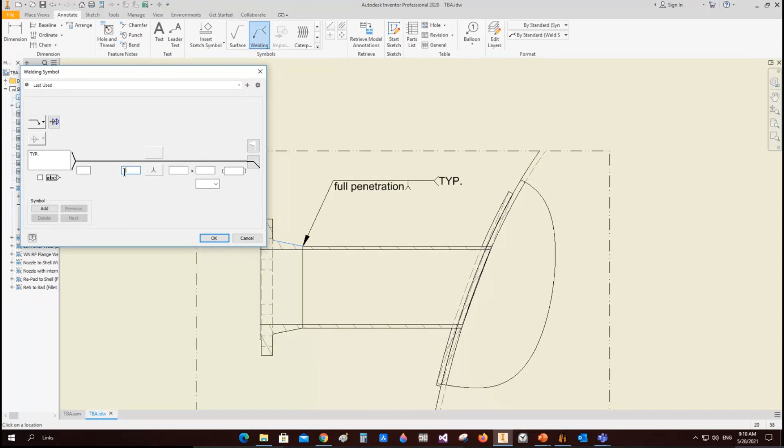And in SEG, here you can figure that we use standard weld details for nozzles. For example, if we come to the nozzle table for N1, if we come back to this table style, you can figure that N1 is according to NW3 welding detail, and the dimensions of the weld are 8 and 7 millimeters. So if we come back here, N1 is according to NW3. Okay, so the A value and the B value are related to that table, which is 8 and 7 millimeters.

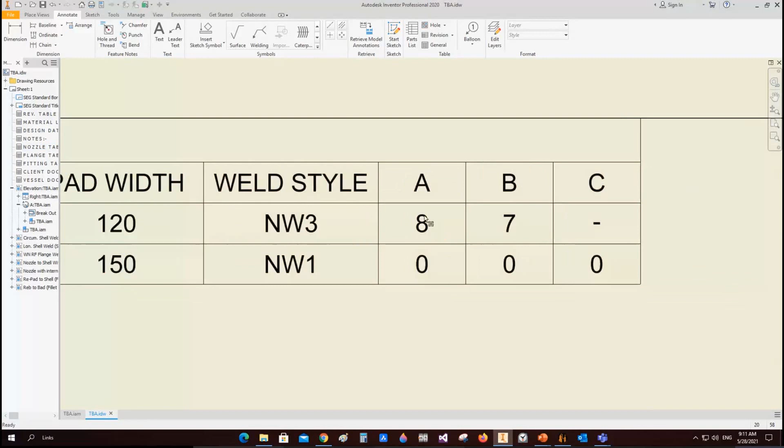By the same way, you can define it for the nozzle N2. In nozzle N2, we didn't define it. So from the setting welding detail, we can change the value of the A. Let's make it 6 millimeters, 7, and let's say 5, for example, and click Save. Now, if we open the nozzle table here, you can figure that those values are changed, and the welding style is changed, which is NW7.

Okay, so if we need to reflect it on the drawing, in the drawing it's still as this. We need to update this drawing and update the welding detail to add another welding detail here, which is NW7. Okay, but we need to reflect it on the table here, make this one NW7 and reflect the values.

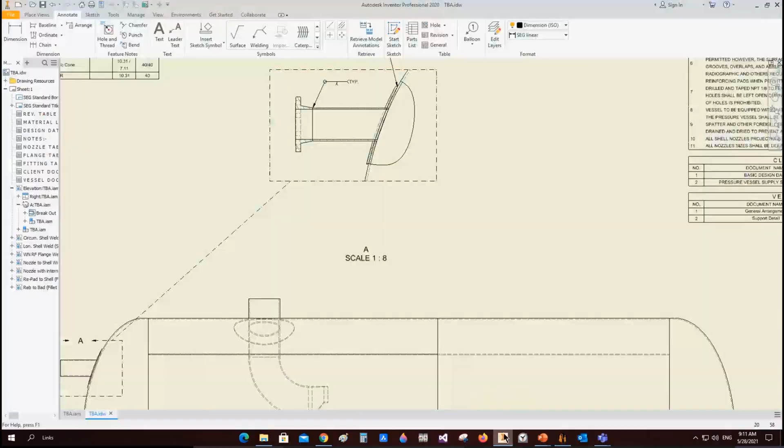So let's come back to the drawing, and from here let's select drawing and create drawing, and from the tables we will remove all tables except the nozzle table. We will keep it, and from here we will click on update the tables. So by clicking on update tables, we will update the nozzle table only.

So by clicking on save and clicking on create drawing, you can see that the table drawing of the nozzle is changing now. Now it's filled with the new values. And if you take a look here, you can see that the nozzle welding style is changing to NW7, and the values become as you defined.

So if you would like to separate this table and those welding details on a separate table, you have the ability to do that. And if you would like to make it manually like that, you can do that by making a view for the nozzle and defining it. By the way, you have the ability to add the welding samples. For example, we have NW3 welding detail for the nozzle connection, so you can add it like this.

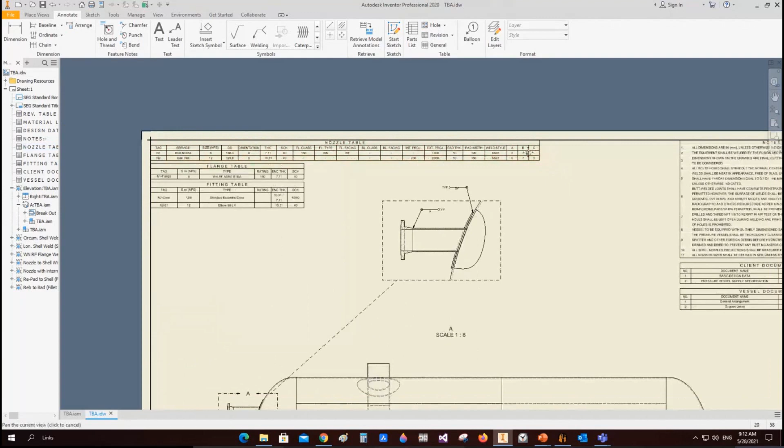So NW3, anytime you would like to know what NW3 is, you come back to NW3 to know that it's a nozzle connection with a reinforced pad to the shell, and here the values of A and B. So you can come back to the table of the welding NW3 for the nozzle, which is N1, to detect the values of A and B. And if you would like to make it manually, you can do it like that.

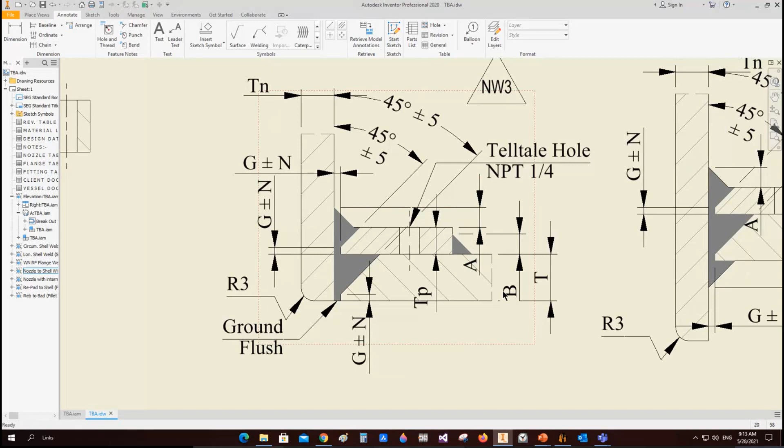The same for the flange to nozzle. So let's add a sample from the standard blocks here. Let's add W1, W2, W3. So from here, if we select the samples and select W3, to define the welding line between the nozzle and flange, you will come back to this detail for small thicknesses.

And if you would like to make another detail for that one, you can find that on the welding details table. You can see if you have double V, not a single V, or with cladding, if you have a cladding inside. So there are many different details you can select from to export to your drawing. I hope this point is covered now.

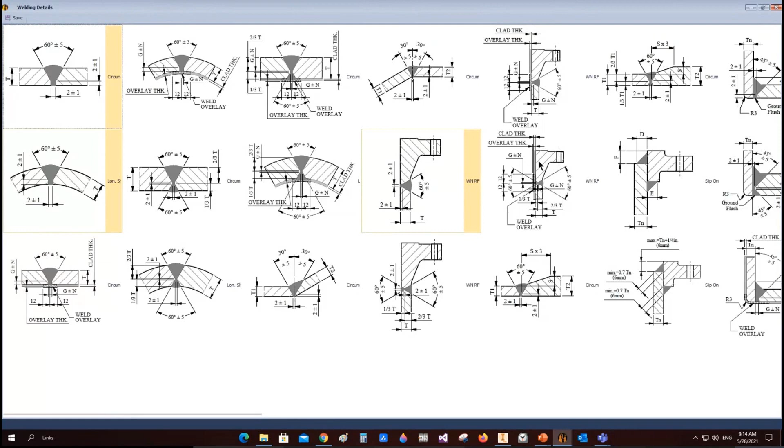For the bill of material, as you can see, the bill of material is generated automatically without taking time from you to fill it. It's just filling automatically. When you add, for example, an ellipsoidal head, you can see that this ellipsoidal head definition or technical characteristics will be generated automatically. Here it's an ellipsoidal head 2:1.

The inside diameter is 2.5 meters. The nominal thickness is 10 millimeters. The minimum thickness after forming is 8 millimeters. The straight flange is 50 millimeters. All the data that you entered here will reflect automatically to the bill of material. The same for the material of this element and the weight of this element.

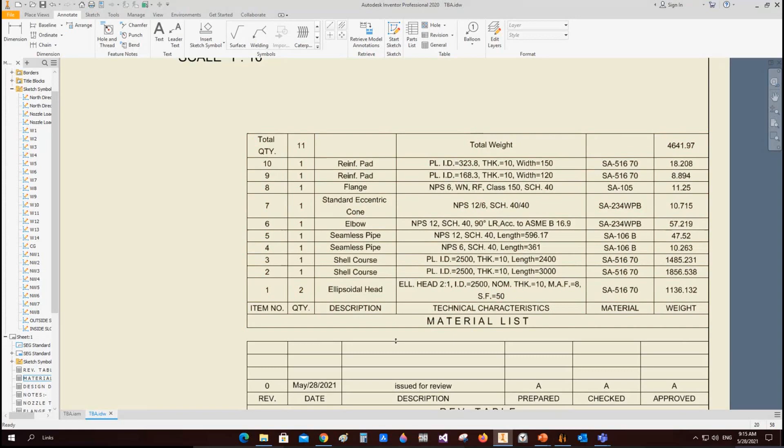For example, if you would like to add an element to the bill of material from your side, not included in the SEG library, you can do that by using the external bill of material. So you have the ability to do more things.

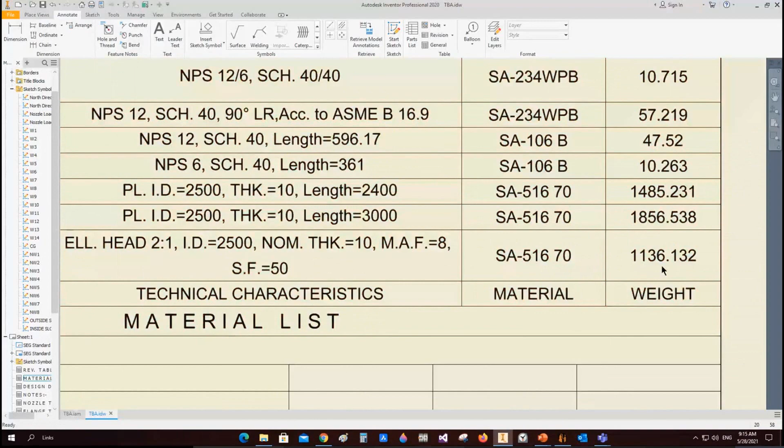I would like to point out some important points regarding the tutorial videos on our channel. You can open it from this button in SEG to go to our channel, and you can see that we have a lot of tutorial videos you can learn from. Our webinars by ImageGrafix are included here. Some questions from our customers regarding our webinars, like how to make a nozzle opening, how to add an external part, how to make a nozzle detail, how to make a group, how to make a nesting, all of that you can check on our channel.

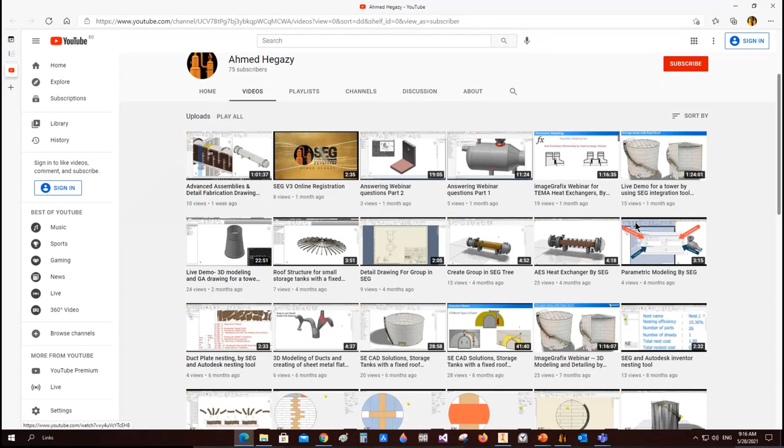And by using the tutorial tab, you have the ability to open our channel directly on the SEG software platform. So you can select the video from here and directly play it in SEG, like that, if you would like to listen to something about that.

And a live chat tool. So you can make a live chat with one of our technical support team. The technical team online chat works for 4 hours per day. So if they are not connected, your questions will be sent by email automatically to our technical team using this tool, and we will reply to it. Or by using the report bug: if you have a question or something like that, you can send your request by using this tab.

Actually, we need correct information from the user, because we will reply to the email that you write in your information. For example, from your profile here, you will define the first name, last name, your company, phone, and your email. So we will use this email to reply to your emails. Any other questions regarding that?

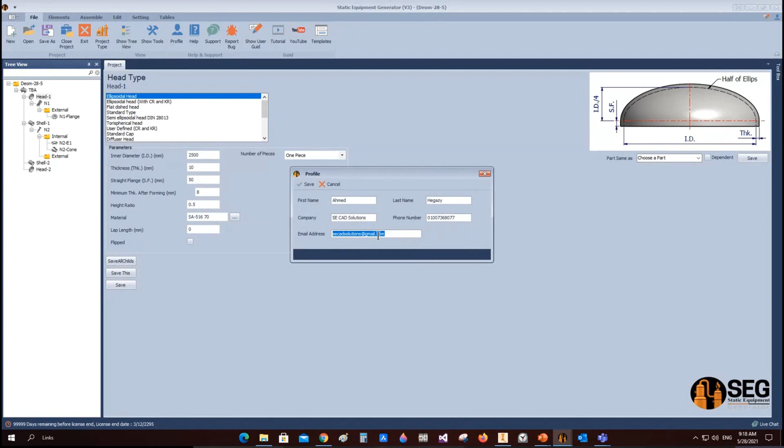So the best thing to do, we would be taking a demo model, like a monthly trial of Inventor, and try to work out how it fits to our needs. Maybe we have one month of hands-on, and then we will come back to you with our actual need. But preliminarily, what we find, it is a really customized and excellent solution for the heat exchanger. But as per our company process, we will try to evaluate for one month, with Inventor also. So once we combine with them, we will come back in detail and revert with our feedback.

Okay, no problem. Fine. Thanks for your valuable feedback, Mr. Hardik. So definitely when you are going to install Inventor for trial, let us know. We will guide you how to install SEG, and we can give you the evaluation license, and you can explore the software and then come back with your feedback.

Yeah. Okay. Do you have a tie-up with Inventor? Like can they give it in one solution, where we can get both SEG and Inventor, or otherwise do we have to separately take it from Inventor? At present, you have to directly contact the dealer of Inventor because we are not selling Inventor. We are only selling SEG. Correct. Okay, maybe we'll take a one month trial license from Autodesk. Yes. The trial license you can directly get from the Autodesk Inventor website. If you fill this form, you can get the trial license for 30 days. Correct. So I think we will work that out.